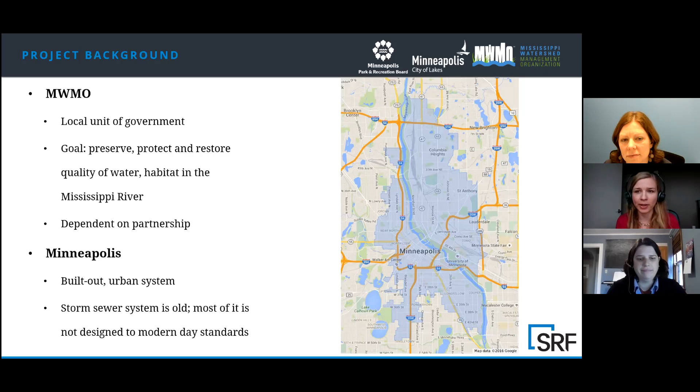The MWMO encompasses about 40 square miles of fully developed lands and waters, and we partner with our members on a variety of stormwater management and habitat improvement projects. Minneapolis makes up about 73% of the area within the MWMO and is a built out urban area with an aging storm sewer system in the process of being updated.

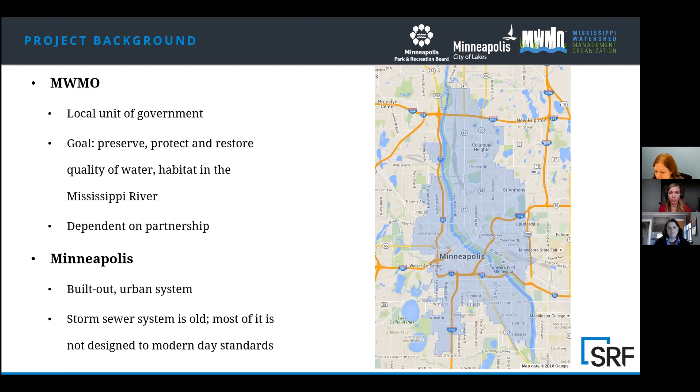Coming into the One Northeast watershed, or 1NE watershed within the MWMO, it's a pretty typical watershed in the urban core in terms of its mixed land use, residential with commercial and some industrial corridors. It's unique in that there's a lot of green space and open corridors, parks, golf course, and rail yard. And large portions of the 1NE watershed are Minneapolis Park and Recreation Board land.

This effort started as a pilot project for the MWMO. Why the 1NE watershed? There are a lot of big picture motivators for the MWMO to focus here and start up the project. Lots of flooding, it's been an issue and an area of study for the city of Minneapolis for years. And the watershed includes Columbia Golf Course and Park, which includes a multi-use athletic field. Most of the watershed drains directly to the Mississippi River with no water quality treatment.

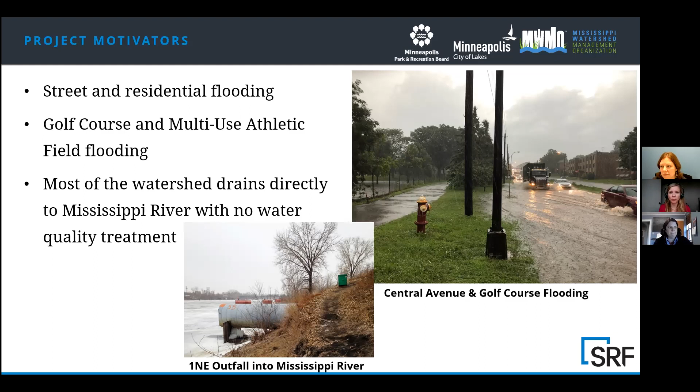The MWMO, City and Park Board formed a partnership to collaborate and focus on solutions for identified issues in the 1NE watershed. Each organization provided a list of goals, and for the purposes of this work, agreed to focus on the areas that overlap. The unique organizational goals were layered into secondary considerations as the project moved forward. Key goals included improving stormwater management, increasing flood resilience, reducing pollutant loading to the Mississippi River, improving ecological function, and improving playability of the golf course and park use.

So the initial One Northeast MOU was signed by the city, the MWMO, and the park board back in the spring of 2017. And that was when our team of SRF, Applied Ecological Services, and Braun Intertec started on the planning and preliminary design portion of the project. That was about a year-long process, so that work was completed in the spring of 2018, and then there was about a year from there that the different partners did some planning and submitted a grant application, and the MWMO received a grant for the project.

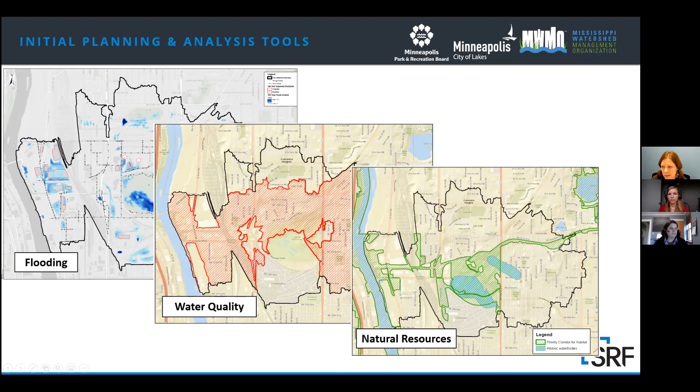Additional motivators for this watershed is that the MWMO has 10 years of monitoring data, which includes both flow monitoring data and water quality data, and even completed calibration of both the XP SWMM and the P8 models. So we have really good data to work with. Also, the city of Minneapolis has street funding and lots of reconstruction work to be done. And as streets are reconstructed, that opens up the ground and gives us access to the storm sewer.

And lastly, the park board has also been doing master planning over the past couple of years and looking at their improvements over the next 5 to 20 years. So we're able to use their planning process to incorporate improvement at the Columbia Golf Course and Park that then went through a community engagement process. And then this master plan that showed these features was approved by the Park Board Commission.

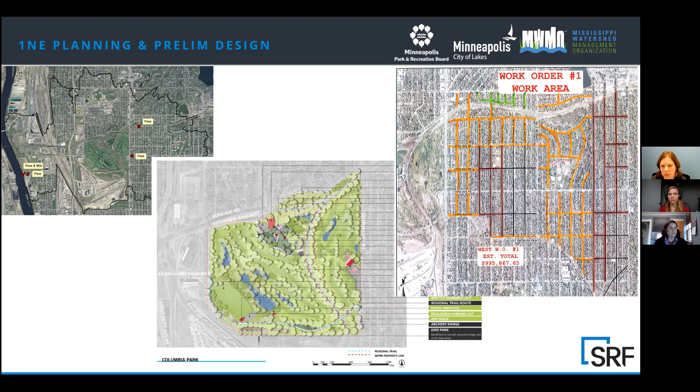So the scope of our initial project was really to conduct a planning and preliminary design for solutions within the watershed. The project started very broad. We held a stormwater workshop with multiple different staff members from the different partners and local agencies, and basically had a brainstorm session. This process led to 29 potential projects within the watershed.

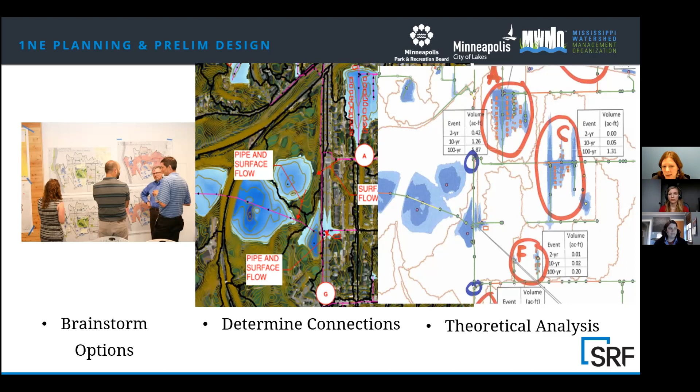And at that time, we did a qualitative assessment of what might be achievable in the next 3 to 5 years, and really narrowed in on focusing upstream of the golf course and improvements in the east and north neighborhoods. Still focusing on the 3 key goals of water quality improvement, flood improvement, and ecological improvement.

So again, the project included these 3 partners with overlapping goals, and then they each had their own agency-specific goals. The MWMO had laid out a pretty detailed process at the beginning of this project, and basically our task was to determine how best to implement this process, with the key goal of getting all partners on board with which projects to move forward. And in order to do that, they needed to have a really good understanding of the results.

So the project started really broad. We wanted to put everything out on the table with the mindset that no idea was a bad idea. And then we narrowed it down ultimately to one scenario that included multiple projects with the goal to implement in the next 3 to 5 years. So this led to the final design of 3 major projects located on city and park board property.

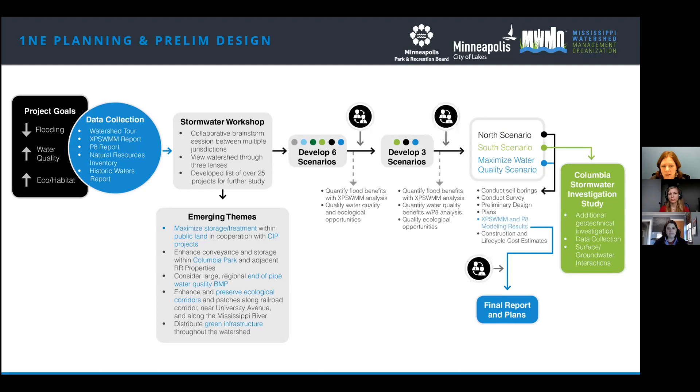This portion of the project also included a large pre-treatment structure to remove sediment and floatables. Construction on this was completed this summer, and this will eventually connect into the Columbia Golf Course project.

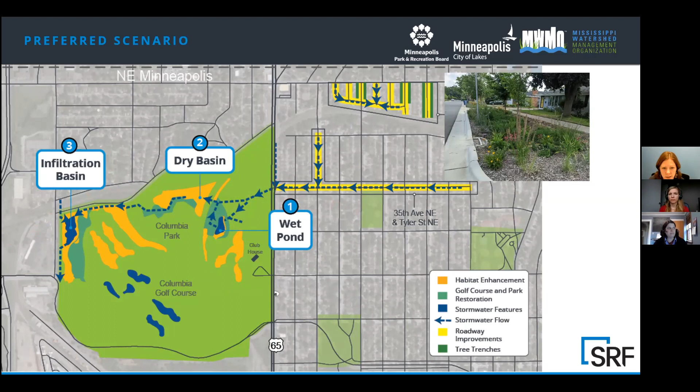So the Columbia Golf Course project, which is shown in the big green area, included new storm sewer within the golf course, an expanded wet pond, a dry basin, and a large infiltration basin. And we'll spend the rest of the presentation talking more about this project. And this project is substantially complete this fall.

So this image shows the over 813 acres that are draining to the Columbia Golf Course project, the majority of which is currently receiving no water quality treatment. There are inlets from city storm sewer on the east side of the golf course and on the northwest side of the golf course. And basically the blue and the orange are the areas that haven't been treated. So this will pass through the proposed BMPs and will result in a significant amount of water quality treatment.

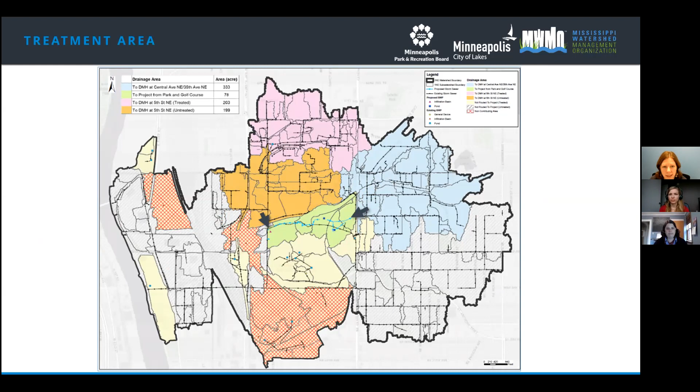I'm going to hand it to Lisa, who will talk more through the design process. Thanks, Erin. Hi, everyone. I'm Lisa Breu, Water Resources Engineer and the lead stormwater designer for this project. This phase of the project included 3 partners and owners: MWMO, the Minneapolis Park and Recreation Board, the City of Minneapolis, and then 5 design consultants: SRF, Norby Golf Course Architects, Applied Ecological Services, CNA for tunnel design, and Braun Intertech for geotechnical evaluation and potential soil contamination.

We connected to a newly upsized 35th Avenue storm sewer trunk coming out of the upstream neighborhood on the east side. A 60-inch reinforced concrete pipe diverts much of that water down to 2 42-inch steel encased plastic pipes that were tunneled under the railroad and then to a dry basin. There is backflow from the dry basin to an enlarged wet pond that previously had no outlet. This was a major area of flooding within the golf course, which will be relieved by the additional storage and new outlet.

Beyond the multi-use field, which still allows for some practice area, a 60-inch reinforced concrete pipe that has been rerouted several times in order to save trees and avoid utilities takes water to a large infiltration basin. This basin will also connect to the neighborhood in the northwest and another enlarged trunk line in the future. There are also many pockets of habitat enhancement shown in orange to connect and enhance those wildlife corridors to the river. The green areas show the extensive golf course redesign that was needed to incorporate both the habitat conversion and our BMPs.

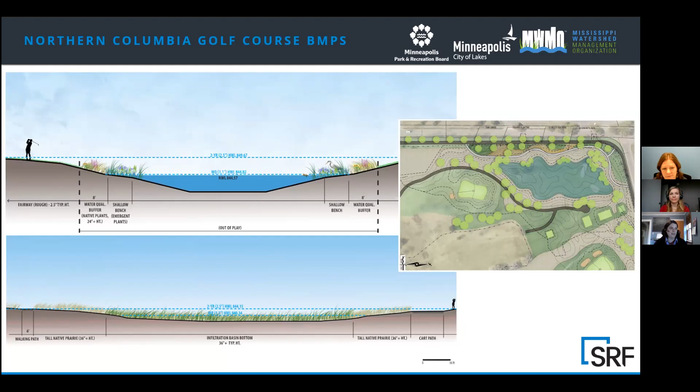Our golf course coordination was quite extensive. We had conversations early on with Minneapolis Park and Rec Board golf course staff, but didn't bring in the golf course architect until after 30% design. This resulted in some late infiltration basin shifts and pond buffer updates. Restoration areas shifted multiple times to be able to maintain sight lines for golf. We had a lot of scribbling and drawing and arguing back and forth about what made sense and met everyone's goals.

Something else that was important was coming up with definitions that we all understood, understanding various types and heights of grasses. Really, in the end, we needed to get in the room together and negotiate areas and understand everyone's viewpoints to make important compromises without compromising any project goals.

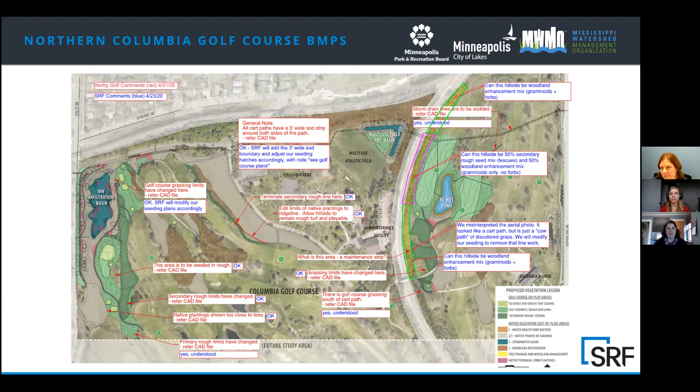Ownership and maintenance responsibilities had to be determined during the design to decide who had the final say or needed to come to the table for design decisions that were often more goal-oriented than technical requirement-based, but also to determine which partners would be responsible for construction costs and to form the partnership agreement. The city is responsible for gray infrastructure, most of the storm sewer pipe, except for some small runs of pipe that only take on golf course drainage.

The BMPs are going to be maintained by MWMO for 2 years, and then afterwards, the city will take on the water quality portions of the BMP, and the park board will take on upper portions. This is determined by changes in vegetation and ultimately an elevation. The park board will take on the entire wet pond since that only receives backflow and golf drainage. Design changes required not only updates to our plans and cost estimates, but also partnership agreement figures and language. I'll hand it back to Erin, who will walk through some of the issues we ran into during construction in the next few slides.

So as I mentioned earlier, construction started last fall. The MWMO has been documenting construction with drone aerial imagery throughout the process, which has been really great. So these pictures were taken last fall and show the infiltration basin on the left and the expanded wet pond and multi-use basin on the right.

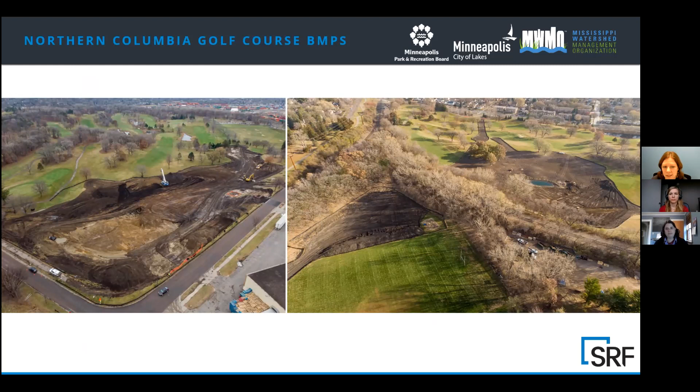So I'm going to walk through a couple of the bigger construction components and some challenges that we experienced working in an urban setting that was developed in the first half of the 20th century. So the large urban drainage area that contributes to the BMPs will contain trash and floatables and debris, and we needed to incorporate pre-treatment before the runoff enters the golf course.

The city of Minneapolis will ultimately be responsible for maintaining the pre-treatment systems, and they already have several types of pre-treatment installed throughout the city. So it was really important for us to meet with their maintenance staff early in the design to get their feedback and have a couple of brainstorm sessions on what works and what doesn't from a performance and maintenance perspective.

Because these are really key to the success of this whole project, having this pre-treatment system work so that the BMPs don't get clogged with sediment and these other floatable items, both from functionality and from an aesthetic perspective. So through this process, we landed on using CDS units to remove the floatables and sediments.

The project included installation of one of these units within the 35th Avenue Northeast project, which is shown in this aerial photo. So these units have a bypass structure and then the CDS units, and these are about 20 to 25 feet deep. So construction and access in this tight residential area were really important. This is just a picture that shows what the unit itself looks like.

There were also 2 units installed in the northwest corner of the project area shown on this image in the upper right. And these are just upstream of the infiltration basin. So they are to capture water from the city storm sewer system before it's diverted into the infiltration basin.

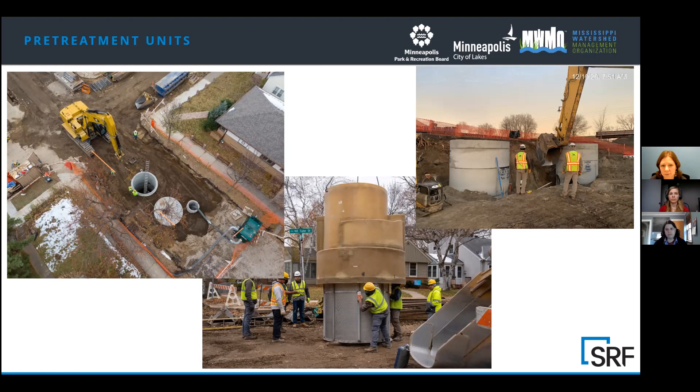Another key component to this project included tunneling of 2 42-inch HDPE pipes encased in 48-inch steel casings beneath the CP railroad. The first pipe was installed without any issues, and that is what is shown in these images here. But the second pipe encountered a tree located in parallel with the pipe with about 20 feet left to go.

So we'd already made it through the railroad embankment, only had about 20 more feet, and they basically couldn't push the pipe through. So they kept trying. It ended up in some schedule delays. They ended up having to switch machines to dead push the pipe the rest of the way. So this resulted in some additional time spent on the tunneling, but we had included an allowance for tunnel obstruction, which did cover the additional cost.

And the other pretty cool thing is that the inverts were only off by a few hundredths, even though they had run into this obstruction located several feet below the ground.

So a big piece of this project is this large infiltration basin. You can see a couple aerial photos to give you the sense of scale of this. We had initially planned for this to be located in this general area of the golf course, but ended up shifting it up into this corner to work better with overall playability of Columbia Golf Course. The basin was built last spring and summer.

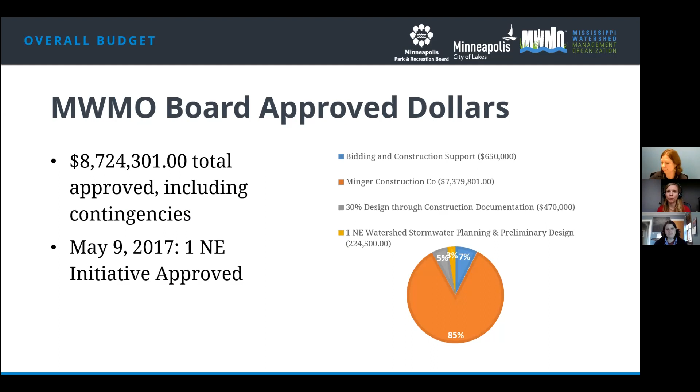And approved total dollars for this project were about $8.7 million, including contingency funds, which must be approved by MWMO staff before usage. The first part of the initiative, the 1NE planning, began back in May 2017. And as you can see with the pie chart, the bulk of the approved funds went towards construction at about 85%.

Breaking it down in terms of the construction contributions only, partners include the MWMO, the City of Minneapolis, the Park Board, and grants. The Park Board does not have any official budget for the project based on Minger's original bid, but covered some golf-related costs as they came up during construction, such as cart path realignment. The MWMO and the city roughly split the costs, with the MWMO covering about $3.5 million and the city providing about $2.9 million. The project was also supported by an $800,000 Board of Water and Soil Resources grant and a $100,000 Hennepin County Opportunity Grant. In total, the bid amount was about $7.4 million.

A good process for project administration has been key for making the project run smoothly. The general review process is that Minger Construction first submits their invoices and payment requests to SRF Consulting. SRF Consulting keeps a spreadsheet to track invoices per period and cumulative invoices and withholds 5% retainage. The MWMO, City, and Park Board then also track and review and note any discrepancies. The MWMO then approves and pays Minger invoices after any resolution, and the MWMO also invoices the City of Minneapolis and the Park Board when appropriate.

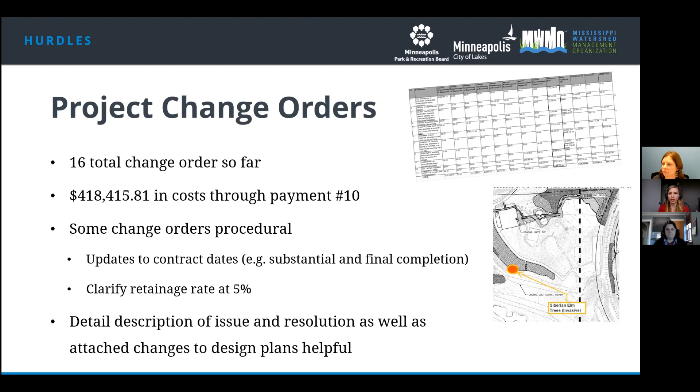Under the stress of expensive change orders, the last thing anyone wants to have to do is start negotiating. The responsibility of each change order is not always black and white, but to minimize gray areas, we not only held many upfront discussions on how funding could be organized among all 3 partners, but we documented it as well in terms of the specific project goals of each partner organization. For example, in this project, the city was primarily interested in flood mitigation in upstream neighborhoods, while the MWMO was primarily interested in removing pollutants from the runoff before entering the Mississippi River, as well as ecological restoration. And the Park Board was primarily interested in improving golf course playability and aesthetics.

Based on these primary goals, we actually spent time negotiating who was responsible for each and every line item in the bid documents, and we collectively reviewed this list each invoice cycle. Change orders or overruns could then, for the most part, be easily associated with each line item. If a change order could not be specifically associated with a particular line item, we would go back to the original primary goals set out at the beginning of the project and associate the change order accordingly.

So if the change order is due, for example, to contaminated soils and a water quality BMP, that would be covered by the MWMO. And if unstable soils require reinforcement to support a storm sewer main, the city would cover the change order costs. And if the Park Board wanted or needed any adjustment to drainage patterns along fairways, they would cover those costs.

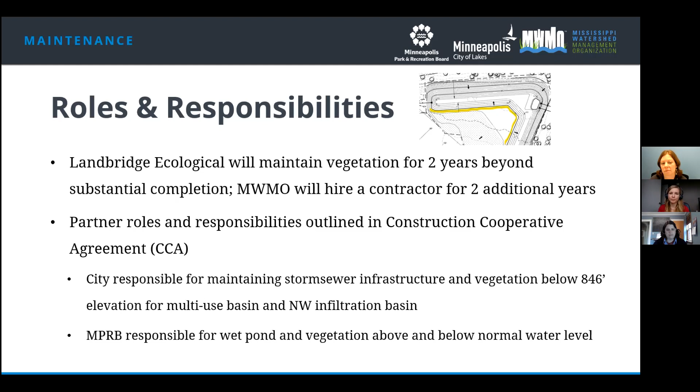Some of the lessons we've learned that will help streamline the future implementation of a multi-partner project like this one with multiple goals include upfront documentation of each organization's project goals and technical objectives, both broad and detailed, thinking hard about the risks and benefits of either investing upfront in a lot of soil borings or setting aside sufficient contingency for those urban soil surprises, and then be prepared to spend that contingency.

Setting up a communications plan prior to the start of construction with the communication professionals from each organization at the table, and allowing each partner to review any notices or email blasts before going out to the public. Start preparing a detailed and very comprehensive operation and maintenance plan early; with multiple partners at play, O&M responsibilities need to be very clear. And then finally, it's been very important to carefully maintain records to help with future understanding and any staff turnover associated with the project.

Next steps for the project include troubleshooting and construction wrap-up for the multi-use basin and northwest infiltration basin, operation and maintenance plan review and initial implementation, vegetation monitoring and maintenance, and ongoing public communications, including developing site interpretation.

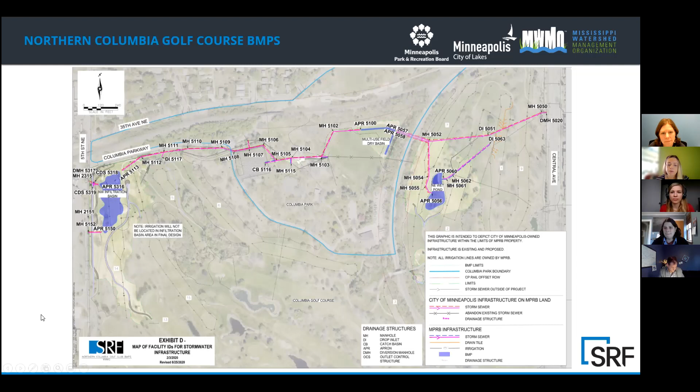Thanks a lot. Okay, let's move on to the next question, which is located in the chat box. This one is from Marcy, and she did ask how much legacy funds were used in this project and asking you to review the funding info slide. I can cover this one. So the bulk of the funding for the project was split between the MWMO and the city of Minneapolis, but it was also supported by two different grants. And so the Board of Water and Soil Resources grant, that's the Clean Water Land and Legacy funding, and that's for $800,000. And there's also a $100,000 Hennepin County Opportunity Grant.

Okay, great. That's all I see in the chat box. Anybody else? So this is Marcy again. The money that came out of the water management organization, was that general funds or benefit funds that came out of benefit areas? How did that get split up? So that's capital funding that comes through our levy. We have general levy funding that goes towards these types of projects, and our projects are generally identified in our watershed management plan. So all of those projects are listed there.